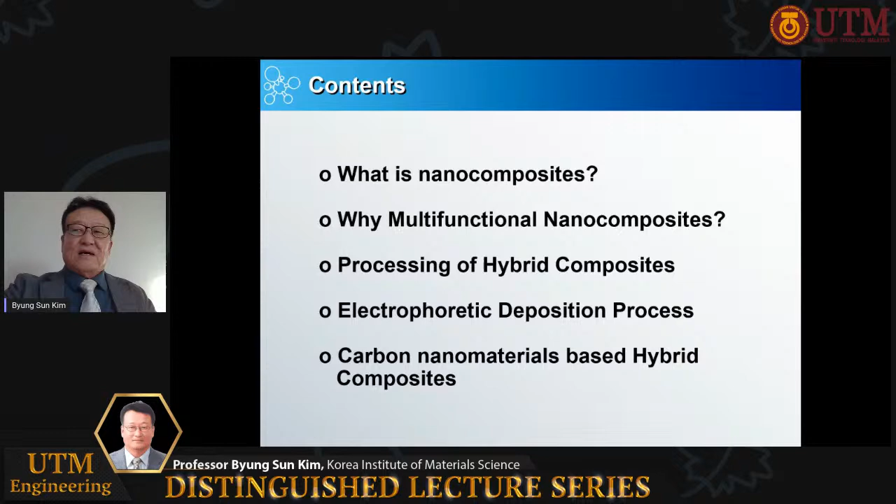What is nanocomposites? When a polymer is reinforced with nano-sized filler, such as clay, carbon nanotubes, or graphene, the resulting material is called nanocomposites. At least one dimension of the filler should be less than 100 nanometers. Polymer nanocomposites are multi-phase hybrid materials that show significantly better thermal, mechanical, barrier, and flammability properties compared to the base polymer at relatively low filler loading. Due to its ability to offer enhanced properties, polymer nanocomposites are used in most of our commodity products today. Next page please.

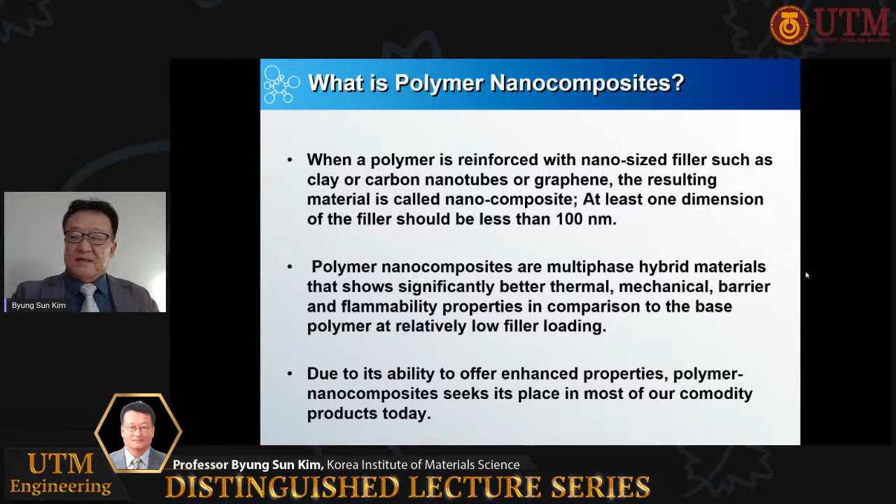Why multifunctional nanocomposites? Due to the development of aerospace, energy, electronics, and telecommunication industries, several requirements are combined in composite systems. Current efforts are focused on improving mechanical, electrical, and thermal properties, as well as combining health monitoring systems with structural composites. Presently, composite materials provide outstanding properties, however relatively simple functions. The future may require higher-end multifunctionality, including hybrid, light and compact, higher integration and eco-friendly materials. Future may also demand structural functional, multi-scale, hybrid, and intellectual and smart composite.

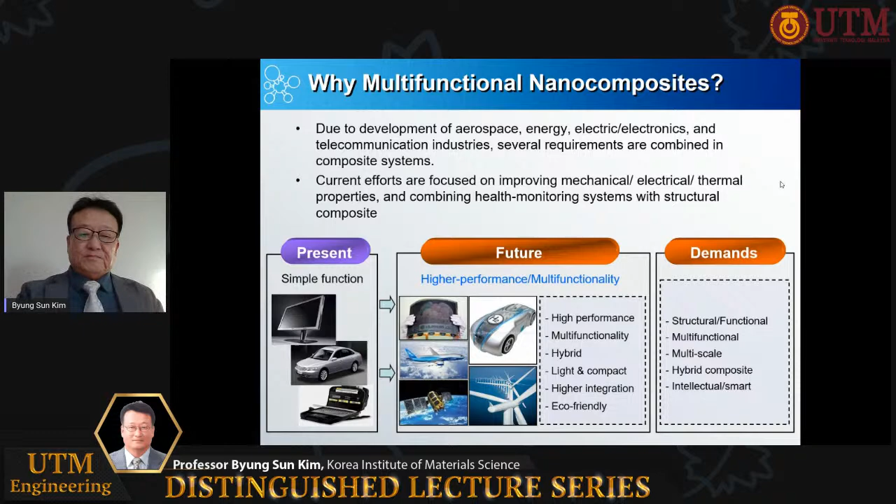Multi-scale hybrid composites are materials that make use of nanofillers to improve the mechanical properties of conventional fiber composites, such as interlaminar shear strength, or to incorporate new features such as electrical properties. Multi-scale hybrid composite requires the development of technologies for advanced carbon nanoparticles, microfiber, multi-scale, multi-directional hybrid composites with structural performance and multifunctionality. Multi-scale, multi-phenomena modeling of structure, property, and function requires modeling hierarchy, bridging the scale from nano to macro.

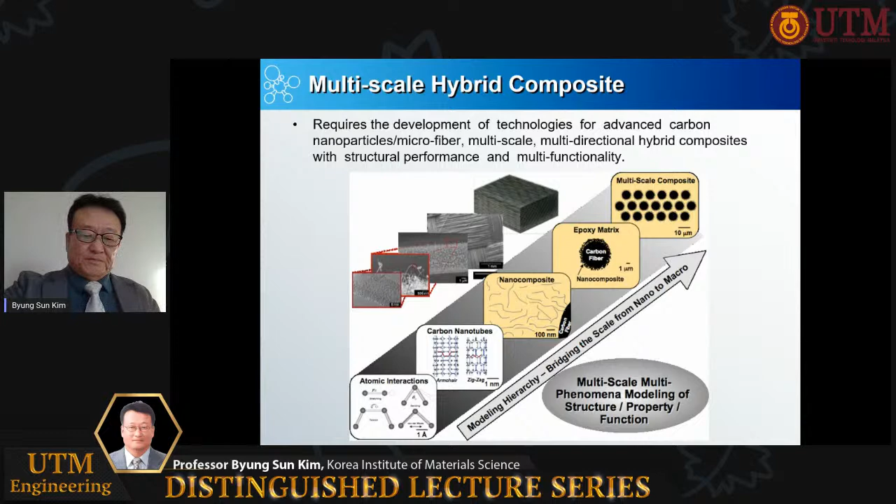Advanced micro-nanocomposites combine reinforcements with different length scales, simply an addition of microfibers and carbon nanomaterials. Microfibers provide structural properties such as light and strong, easy tailoring, and design flexibility, while nanomaterials may provide ultra-high strength, high functionality, and high aspect ratio.

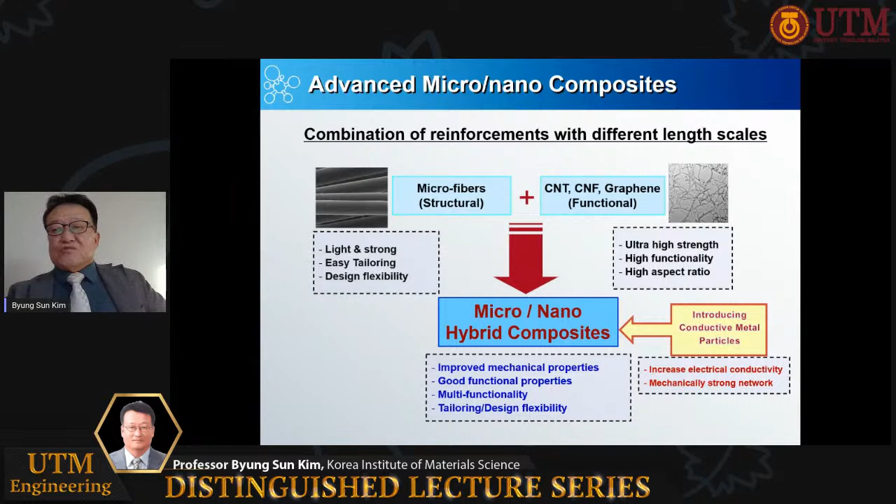The addition of these two materials creates micro-nano hybrid composites, which may have improved mechanical properties, good functional properties, multifunctionality, tailoring, and design flexibility. Moreover, if conductive metal particles are additionally introduced to the nanocomposite, further increase in electrical conductivity and a mechanically stronger network may be added.

In processing of hybrid composites, the bottleneck technologies are difficulties of even dispersion of nanoparticles within the matrix, which causes particle agglomeration, and difficulty to infuse nanoparticles into the preform due to high viscosity. Overall, limited percentage of nanoparticles and lack of uniformity within the composite may occur.

This phenomenon can be seen in the top view. When the CNT and resin mixture is poured onto a stack of fabrics, the CNT may be poorly dispersed and agglomerated at the area of CNT addition. These bottleneck technologies are responsible for the reduction of structural and functional properties of the hybrid composite.

However, with improved technology, these issues may be solved. With new technologies, high percentage of carbon nanomaterials and uniform distribution can be achieved. By hybridization of the reinforcements, carbon nanomaterials can be evenly deposited on carbon fabric by EPD. By hybridization of carbon nanomaterials and resin, B-stage resin film may be processed.

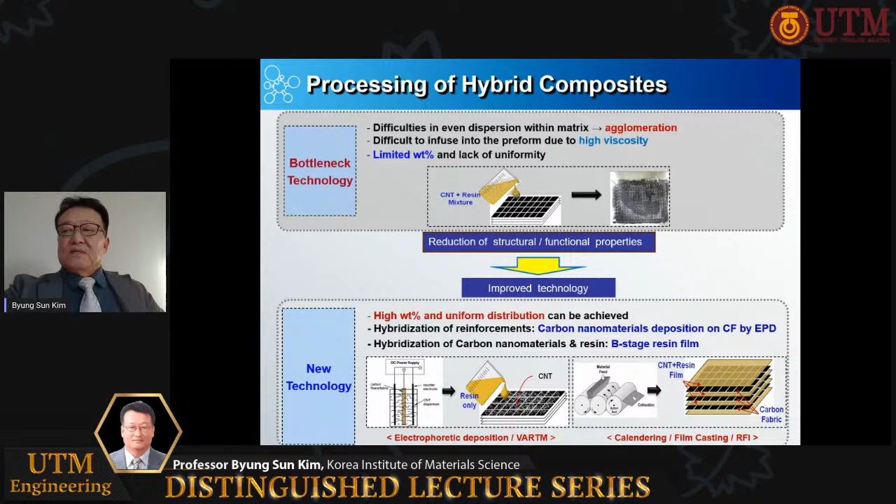This slide summarizes some of the previous research on hybrid composites. Top left is CNT aluminum composite processed by hot press and extrusion. Bottom left is CNT aluminum composite processed by spark plasma sintering. Top right is CNT copper composite processed by molecular level mixing.

All three processes have used mechanical mixing techniques and high sintering temperatures. The results were inhomogeneous nanoparticle dispersion, composite degradation, slow process, and low scalability. However, with the EPD process, simple and effective dispersion may be achieved, and the final composite is readily scalable for large scale production.

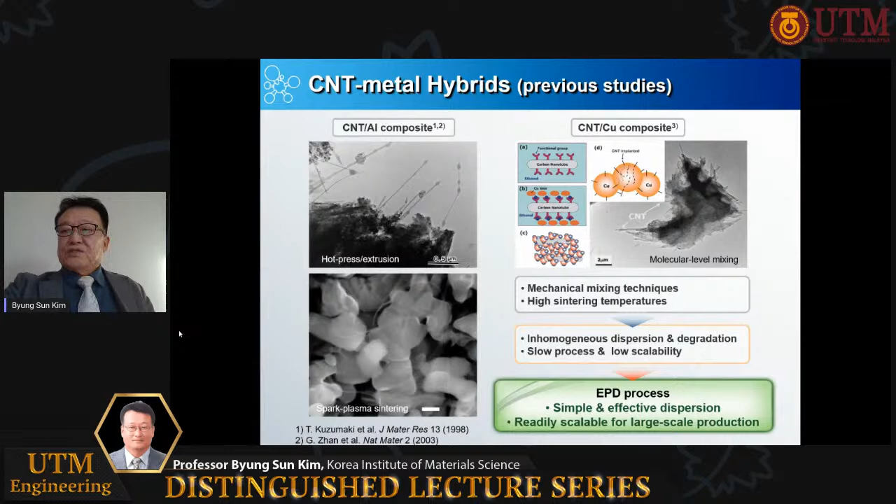Van der Waals forces include attraction and repulsion between atoms, molecules, and surfaces, as well as other intermolecular forces. CNT is known to possess a very high aspect ratio of about 10,000, Young's modulus of 1 to 2 terapascal, and tensile strength of 200 gigapascal.

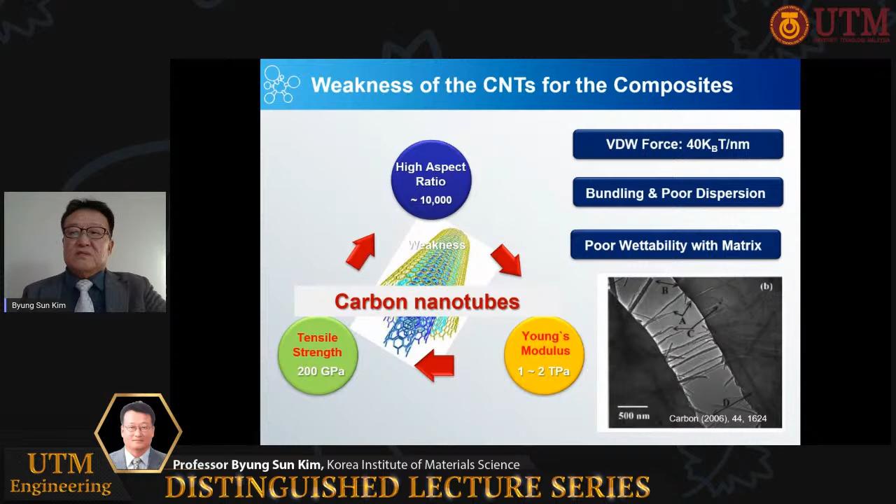However, due to Van der Waals forces acting between CNTs, bundling and poor dispersion of CNT exists within the matrix, which as a result causes poor wettability within the matrix. These are the major obstacles for the most efficient composite applications.

The electrophoretic deposition process is based on the movement and deposition of charged particles in an electric field onto a conductive electrode to develop thin or thick films and coatings. The advantages of EPD process are the short formation time, simple apparatus, and the ability to produce uniform coatings on complex geometries.

In other words, electrophoretic deposition is an electrocoating method such that the charged particles in a suitable suspension move toward an anode or cathode under the electric field. Aqueous suspension is used in this method. Under the electric field, the charged particles in the solution are moved and deposited on the opposite electrode surface.

Next. Next page. Okay, thank you.

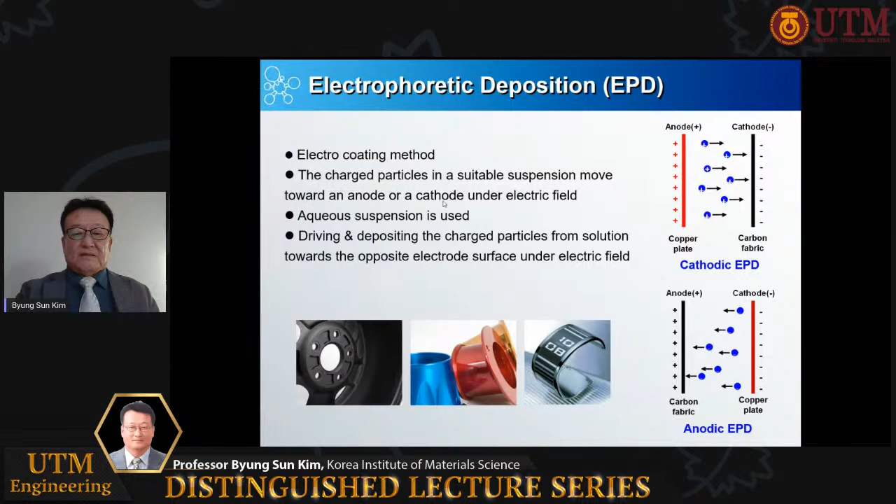In manufacturing of the novel CNT copper hybrid, there are two ways to treat carbon nanomaterials such as CNT. In the cathodic EPD process, as shown on the top portion of this flow diagram, CNTs are PEI treated to have plus charge. Then these CNTs via EPD process will be deposited on the surface of the carbon fabric to produce formicary-like CNT copper nanostructures.

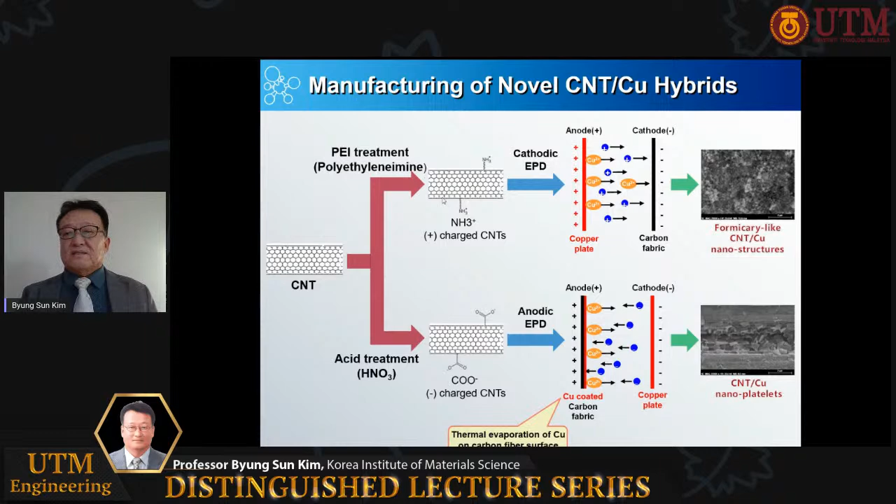In the anodic EPD process, CNTs are nitric acid treated to have minus charge. Then these CNTs via EPD process will be deposited on the surface of copper-coated carbon fabric to produce CNT copper nanoplatelets. In the next few slides, the EPD processes will be discussed in more detail.

In cathodic EPD, under an electric field, there will be electrical oxidation on the anode. Then the copper element from the copper plate and the plus charged CNTs move toward the cathode and are simultaneously deposited on the surface of the carbon fabric.

The picture of the copper plates below shows the dark copper plate before and the cleaner copper plate after the cathodic EPD process. This method may be used to clean the copper plate, although it may be a little bit expensive.

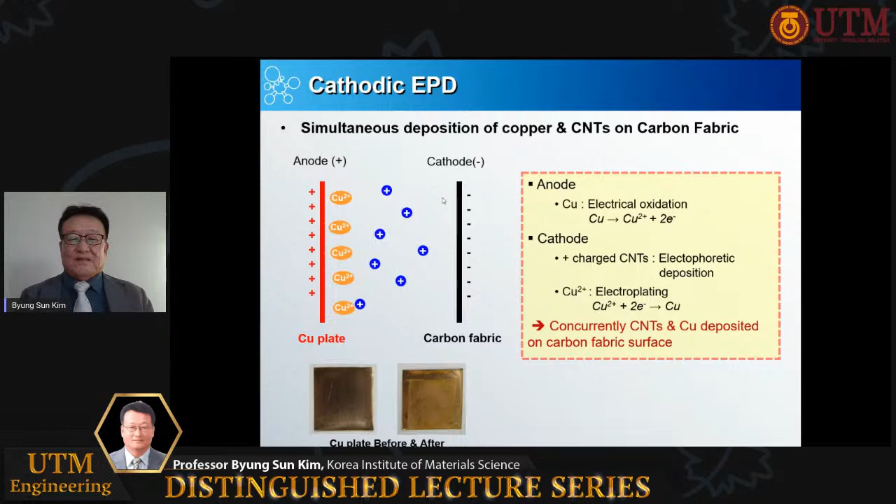Cathodic electrophoretic deposition process has been applied to produce unique carbon nanotube copper nanostructures on carbon fiber surfaces. During the deposition process, ionized copper and positively charged CNTs are accelerated towards the carbon fiber by the applied electric fields. An interconnected formicary-like network of nanotubes and nanoparticles is formed, where copper nucleation and growth occurs predominantly at the nanotube crossings and edge contact locations.

When embedded in a structural composite, the CNT copper structures create a highly conductive and strongly bonded network, shown by the significant enhancement in both electrical conductivity and interlaminar shear strength compared to composite without the CNT copper nanostructures. Therefore, the electrical conductivity of the hybrid composite in all directions may be the same and outstanding.

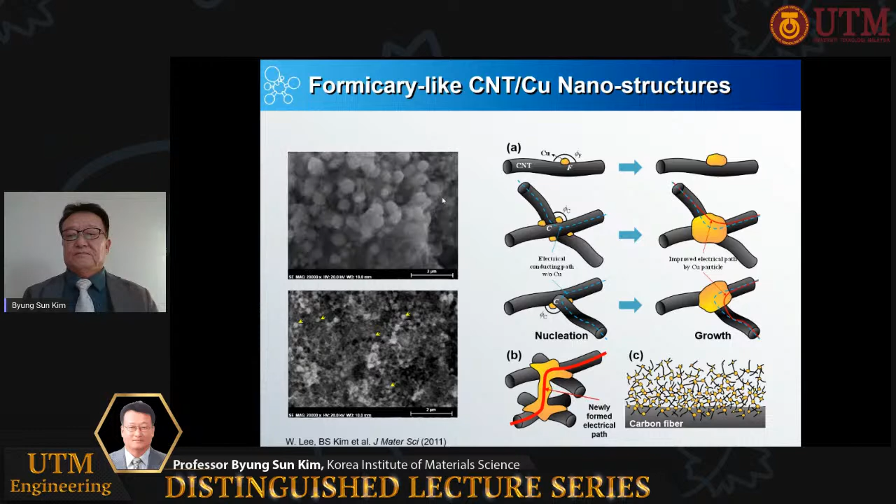Anodic EPD is a two-step deposition process, which includes thermal vapor deposition of copper on carbon fabric before the anodic EPD process. Thermal vapor deposition of copper on carbon fabric is the sputtering of copper element onto carbon fabric.

In the anodic EPD process, under an electric field, minus charged CNTs move toward an anode and are deposited on copper-coated carbon fabric. The schematic drawing below shows carbon fabric before and after copper coating by thermal evaporation. Obviously, brown color clearly shows the copper element deposition.

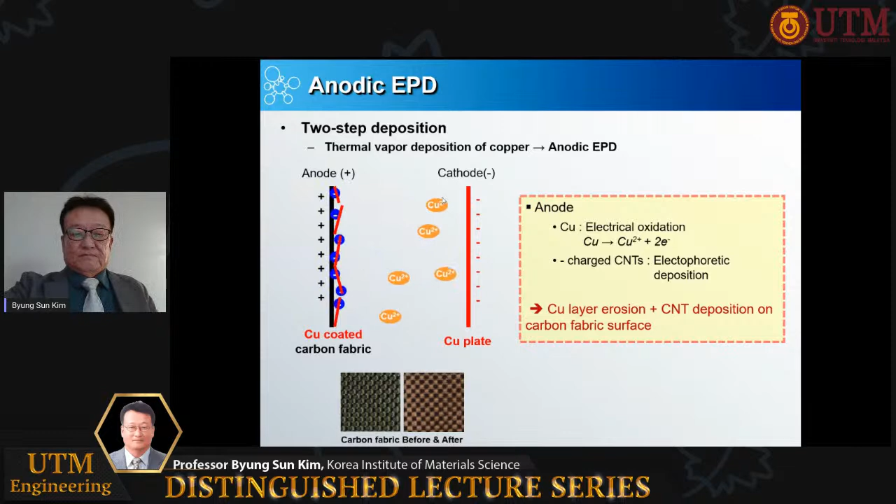Carbon nanotube reinforced copper nanoplatelets were developed by a simple two-step deposition method: thermal vapor deposition of copper and anodic electrophoretic deposition of CNT. Due to the fast corrosion during the electrophoresis, the copper layer is broken into pieces and exfoliated to form platelet structures.

Then during the EPD process, the CNT deposition will bridge the gaps. Consequently, highly conductive and strong CNT copper nanoplatelets are effectively built up. When applied in carbon fiber composite, the CNT copper nanoplatelets significantly enhanced both interlaminar shear strength and electrical conductivity compared to baseline composites.

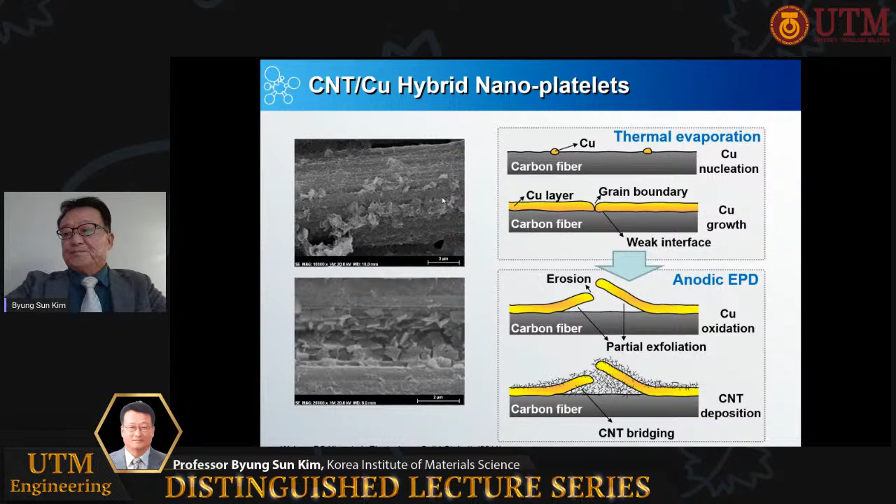In nanocomposite fabrication and characterization, 6 plies of carbon fabrics are EPD processed at the same time, using an aqueous solution. The processed carbon fabrics are dried and vacuum-assisted resin transfer molding processed to produce test specimens. Electrical conductivity tests are carried out for copper, CNT, and carbon fabric network in-plane and through the thickness of the nanocomposites. Mechanical tests are performed for shear stress and short beam properties of the nanocomposites.

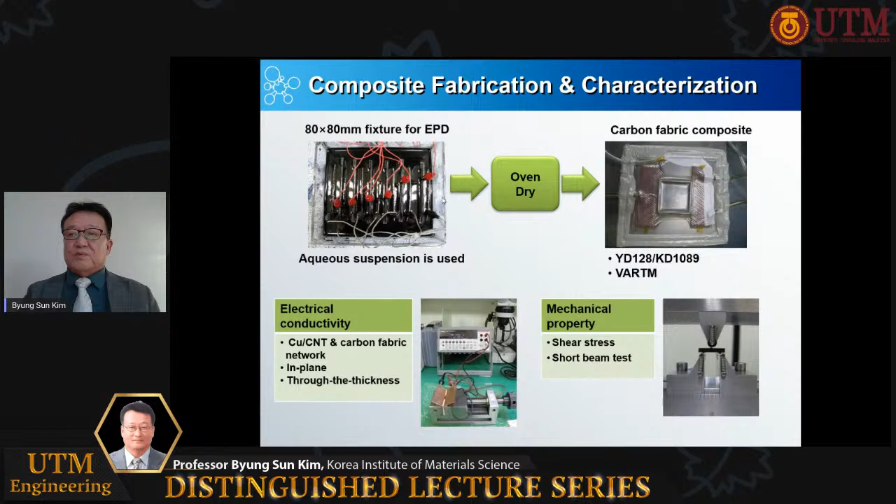The graph represents the electrical conductivities for various nanocomposites: copper only by cathodic process, copper only by thermal process, CNT only by anodic process, CNT copper formicary, and CNT copper platelets.

The in-plane electrical conductivities for all nanocomposites appear to have fairly similar values. However, the out-of-plane electrical conductivity is the highest with CNT copper formicary nanocomposite, and the CNT copper platelets nanocomposites show almost as good values.

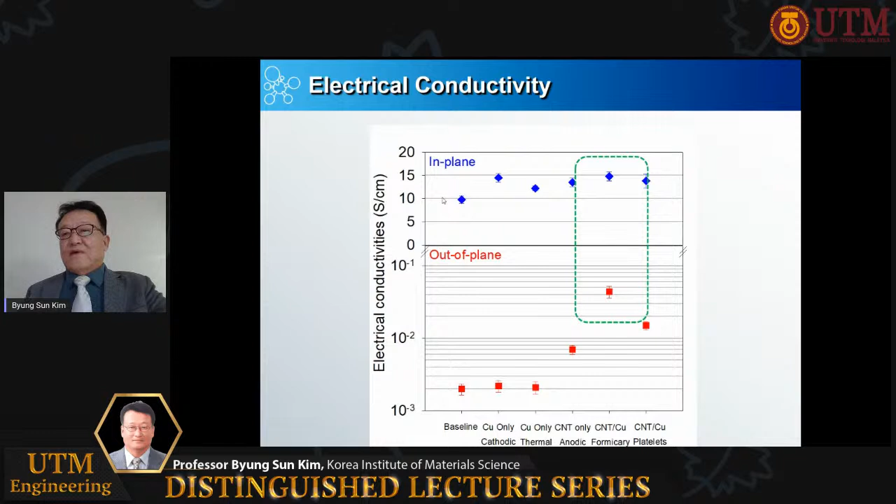The graph represents the interlaminar shear strength for various nanocomposites. Among all, the interlaminar shear strength is highest with both CNT copper formicary and CNT copper platelet nanocomposites. This may be due to the higher deposition of copper at CNT interfaces for CNT copper formicary nanocomposite, and that of CNTs in the gaps between carbon fiber and copper layers for CNT copper platelets.

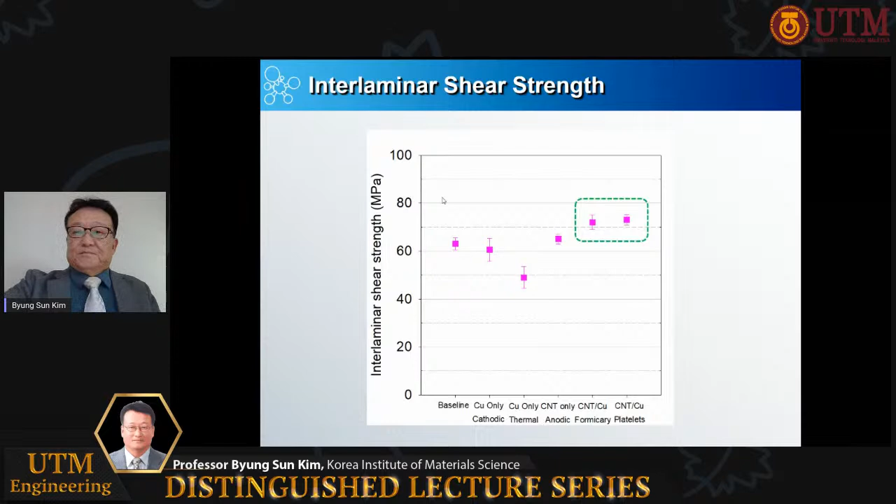This is the morphology for the fracture surfaces of nanocomposites compared with microcomposite. The fracture surface of the microcomposite is quite smooth compared with that of all nanocomposites. Fracture surfaces of all nanocomposites show deposition traces of CNT as well as copper.

However, the bottom three show more depositions of CNT and copper respectively. CNT copper depositions are seen on the fracture surfaces of formicary and platelet nanocomposites, while only CNT is deposited on CNT-only nanocomposites. These fracture surfaces may explain why the bottom three composites' electrical conductivity and interlaminar shear strength have relatively higher values.

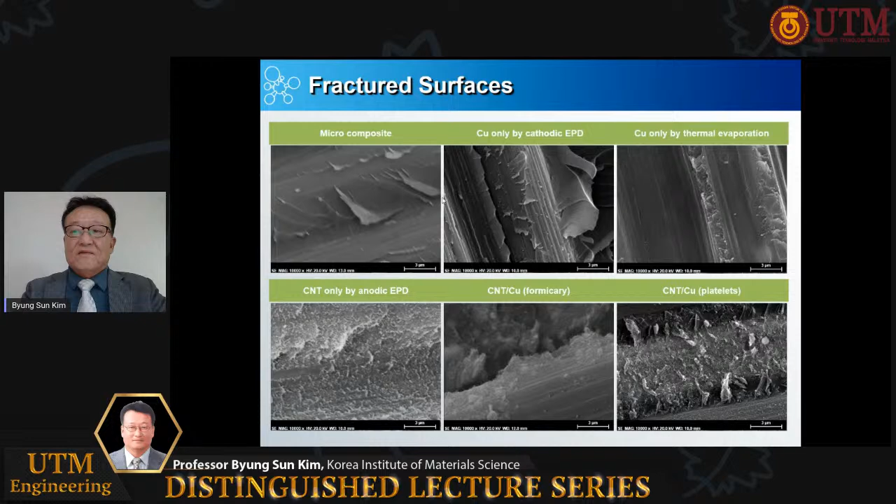Using the sizing agent characteristics of graphene oxide, the electrophoretic deposition process is used. In this process, when the electric field is applied to the substrate in the graphene oxide solution, graphene oxide can be attached to the anode substrate because graphene oxide has a negative charge.

So here, the carbon fabric is connected to the anode and the stainless steel to the cathode as the counter electrode. When the electric field is applied, graphene oxide is coated on the carbon fabric surface. Finally, graphene oxide coated carbon fabric reinforced composite is dried and stacked to be fabricated using the VARTM process.

As shown in the SEM morphologies, graphene oxide is very well coated on the carbon fiber surface with 7/10,000 and 7/100th of a weight percent of graphene oxide, respectively.

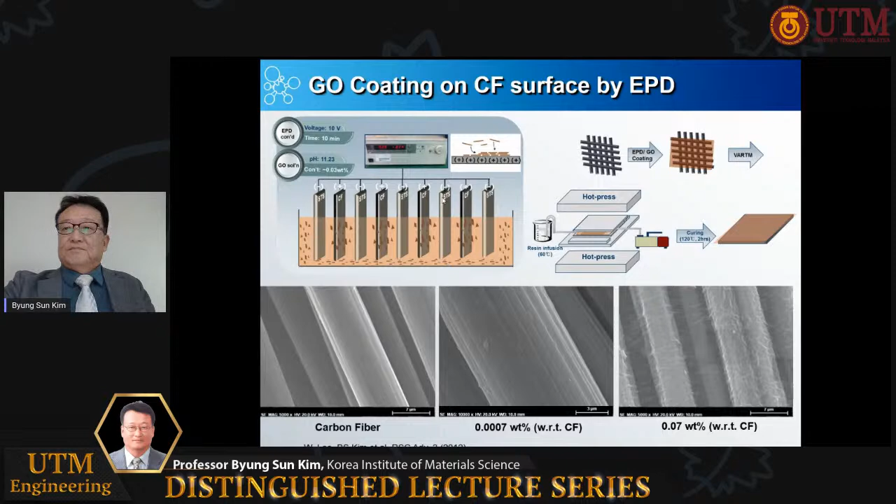Here, the interfacial property of graphene oxide coated carbon fiber is investigated in terms of both quantitative and qualitative approaches. When a micro drop of epoxy resin is placed on a single carbon fiber, graphene oxide coated carbon fiber showed less contact angle, which means the graphene oxide increased the wettability with epoxy resin.

And also, when the surface free energy is calculated by the equation shown here, which is the sum of dispersive and polar components, graphene oxide coated carbon fiber showed higher polar and dispersive surface energy. Therefore, it can be proved that the interfacial strength between carbon fiber and epoxy is higher.

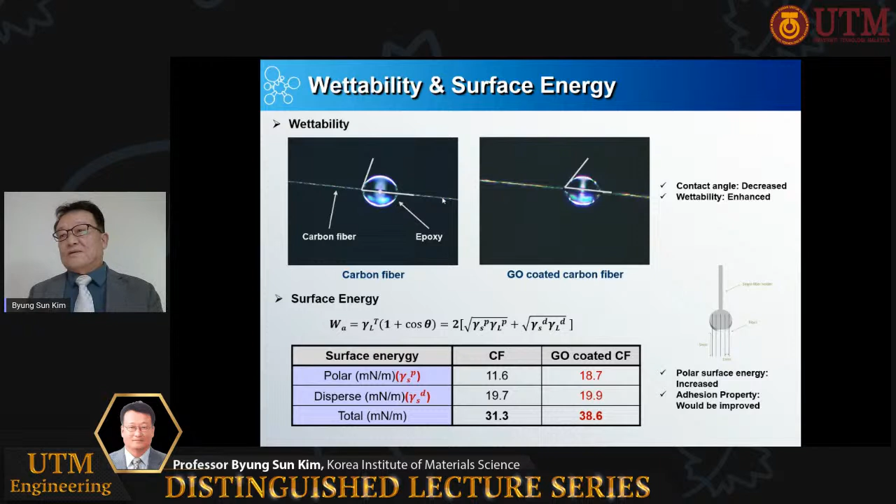The graph shows the effect of graphene oxide coating on the interlaminar shear strength, an important material property for the design of laminated composite structures subjected to transverse load. With only 7/10,000 of a weight percent of graphene oxide coating, the interlaminar shear strength is increased by almost 10%. Previously, the same results were obtained with more than 1 weight percent of carbon nanotubes.

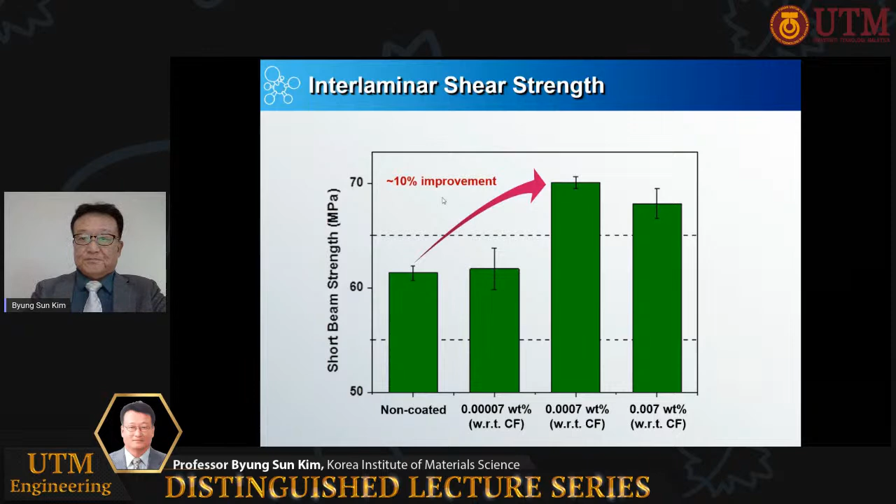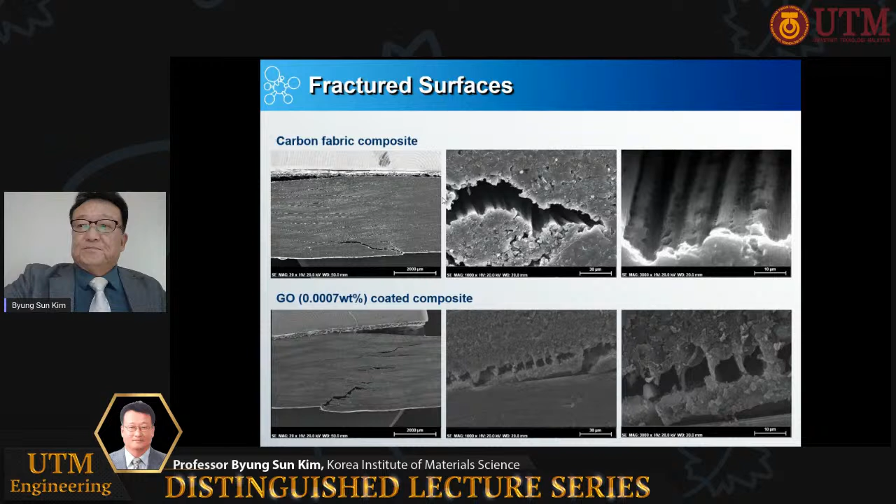In the next few slides, wire-type multifunctional hybrid composite fibers are discussed. For the wire-type supercapacitor, the requirements are that the stretchable wire-type supercapacitor for wearable devices should have high electrical conductivity, flexibility, high specific surface area, and tough stretchability.

Carbon fibers may be used as the collector for supercapacitors since they have high electrical conductivity and high flexibility. However, carbon fibers have a poor surface area, only 5 meters squared per gram, and this needs to be increased since the performance of the supercapacitor depends on specific surface area.

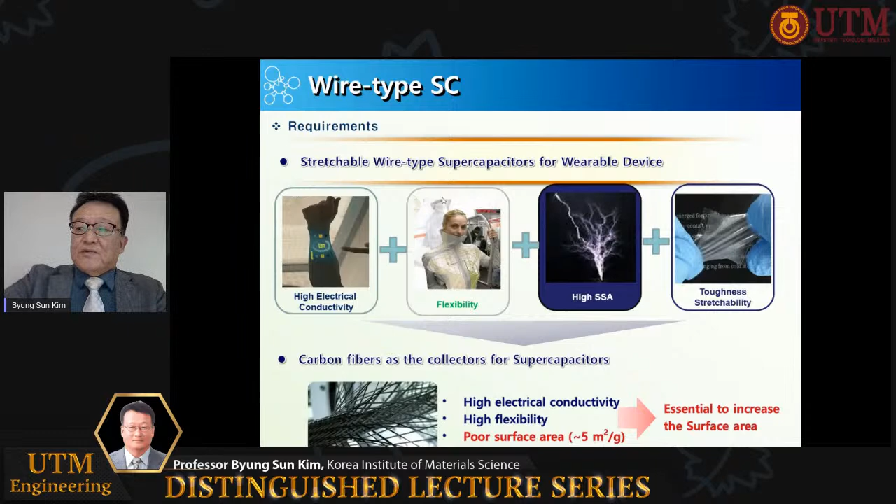In order to increase specific surface area, our strategy was to decorate single-wall CNT aerogels, which have the largest surface area and good electrical conductivity, around the carbon fiber surface. Firstly, graphene-coated single-wall CNT aerogel was synthesized as shown in the photos.

We carried out in situ polymerization of dopamine around the single-wall CNT network, as shown in the top schematic drawings. Uniform coating of graphitic layers was achieved with carbonization and nitrogen-containing graphene. Graphene-coated single-wall CNT aerogels are mechanically stable even after water absorption.

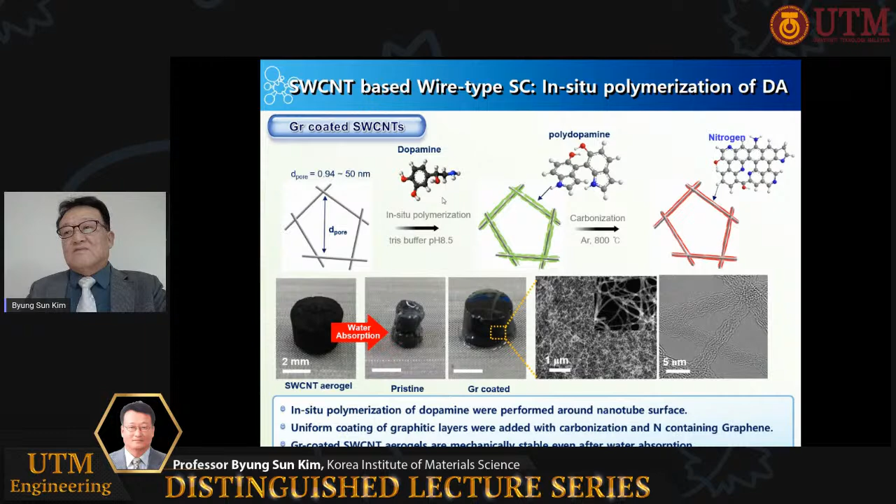Three-dimensional carbon nanostructure hydrogel was coated around the carbon fibers, which serve as the core collector. Increased surface area and capacitance for wire-type electrodes via porous SWCNT networks are obtained. Graphitic layer coating on the single-wall CNT networks enhances mechanical and electrical stability of the porous structures, which possess low equivalent series resistance and high electrical double layer capacitance.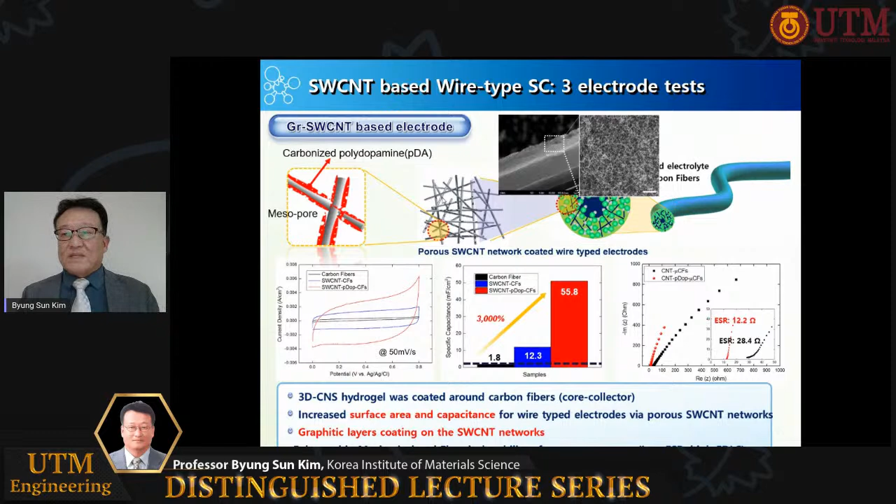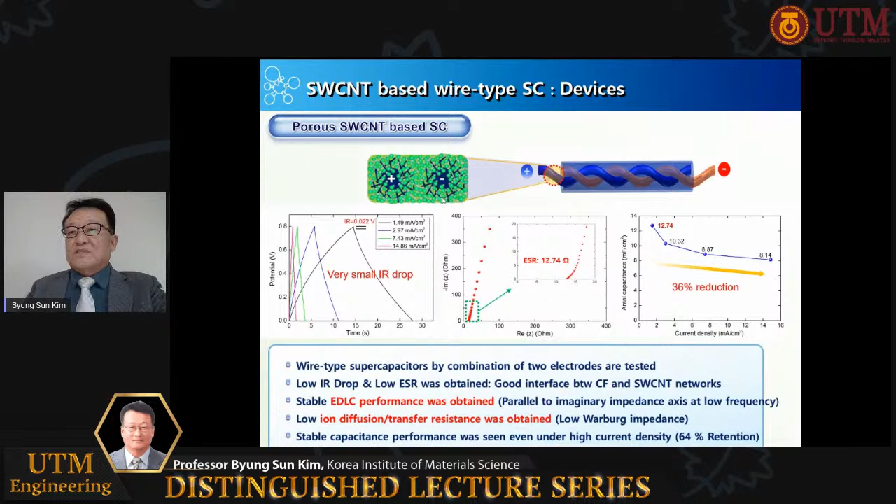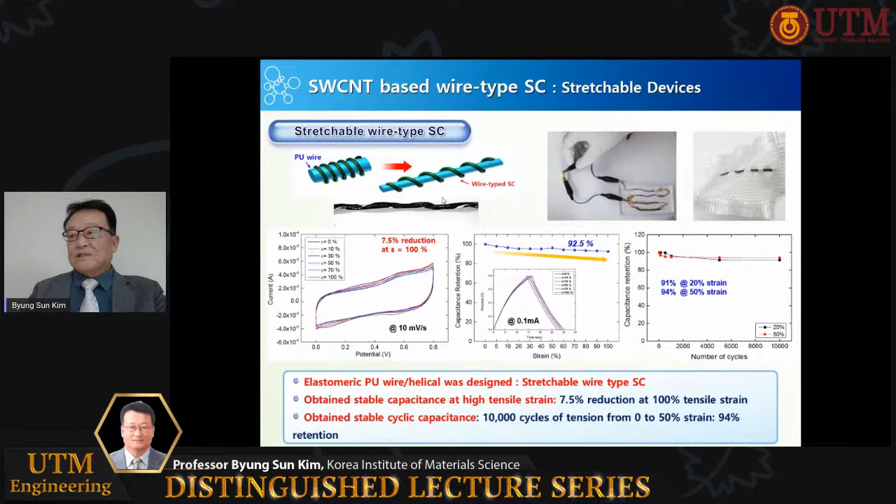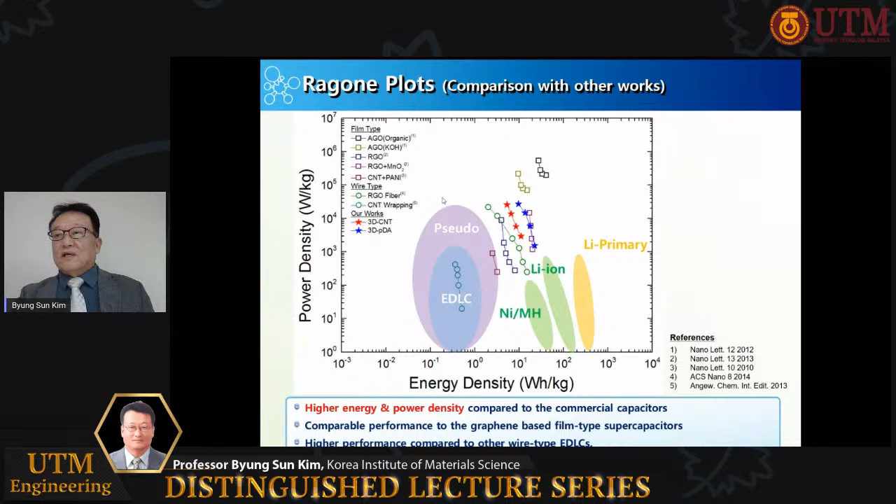In the Ragone plot, our wire's power density is indicated by red and blue stars, showing higher energy and power density compared to commercial capacitors, comparable performance to graphene-based film-type supercapacitors, and high performance compared to other wire-type electrical double layer capacitances.

Can I continue, or should I stop because of the time?

Okay, I'll go on. In order to have improved fiber-type transistors with higher electrical conductivity, stronger mechanical properties, and higher flexibility, graphene fibers are manufactured.

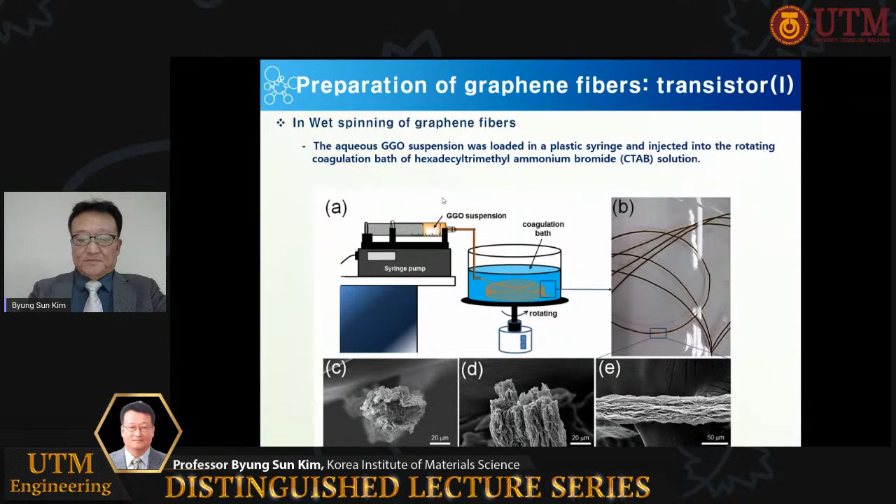In wet spinning of graphene fibers, the aqueous graphene oxide suspension was loaded in a plastic syringe and injected into the rotating coagulation bath of hexadecyl trimethyl ammonium bromide solution. In the wet drawing of the graphene fiber, the wet drawing system was simply realized in the drawing process by adjusting the distance between each end of the gel fibers.

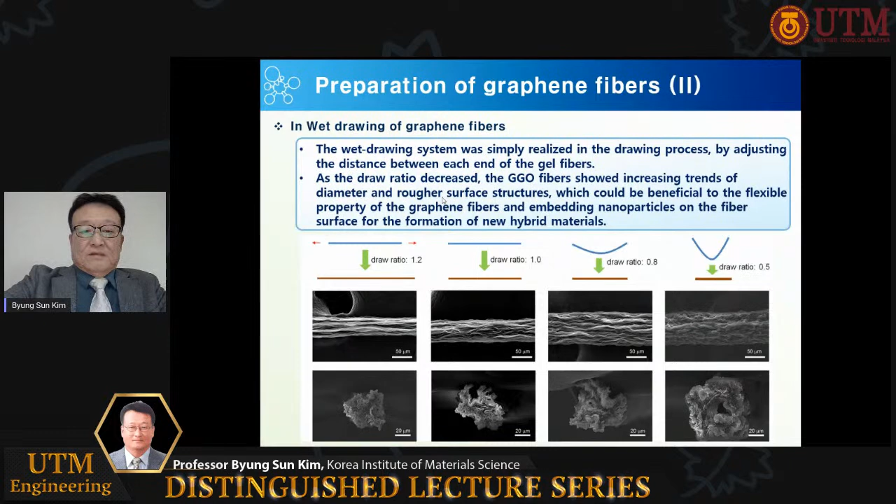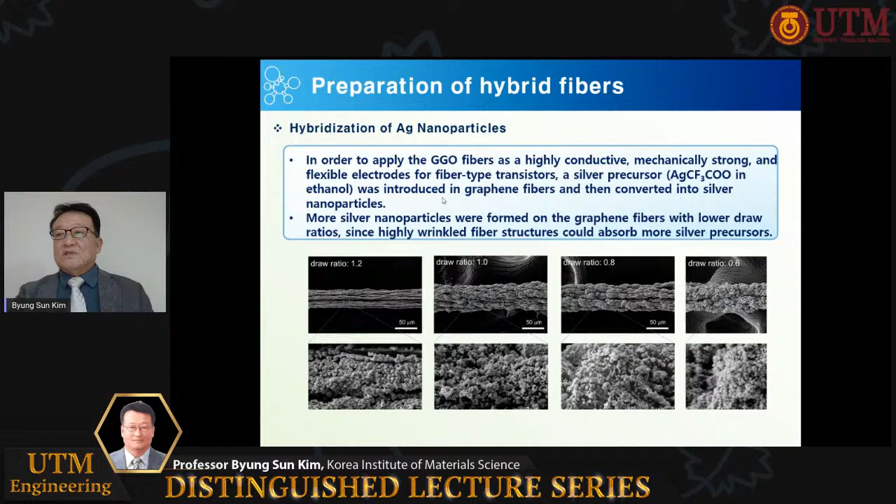In the hybridization of silver nanoparticles, in order to apply graphene oxide fiber as a highly conductive, mechanically strong, and flexible electrode for fiber-type transistors, a silver precursor was introduced into graphene fibers and then converted into silver nanoparticles.

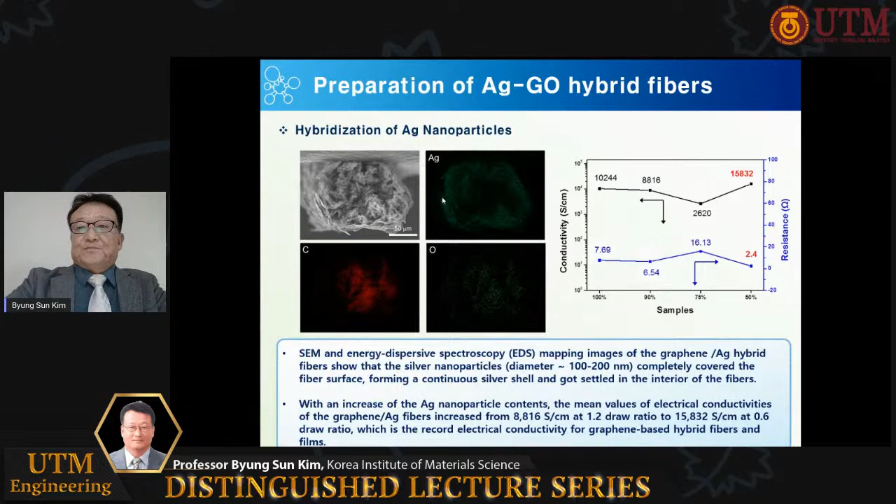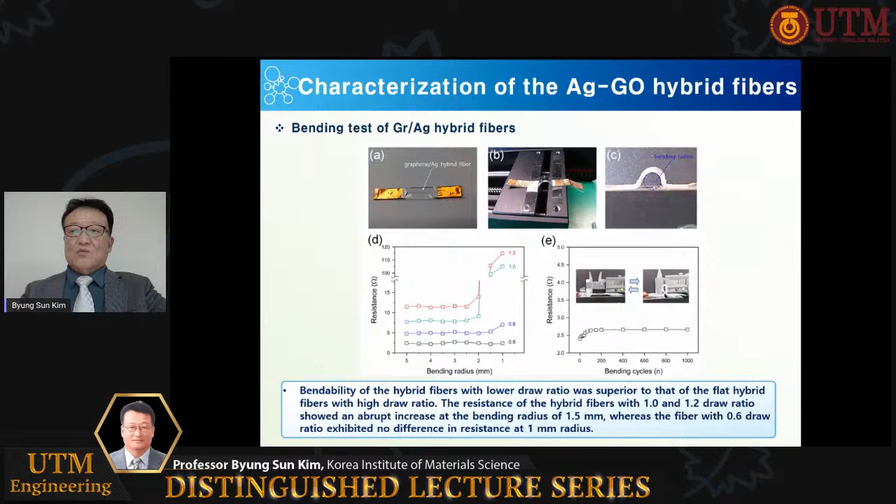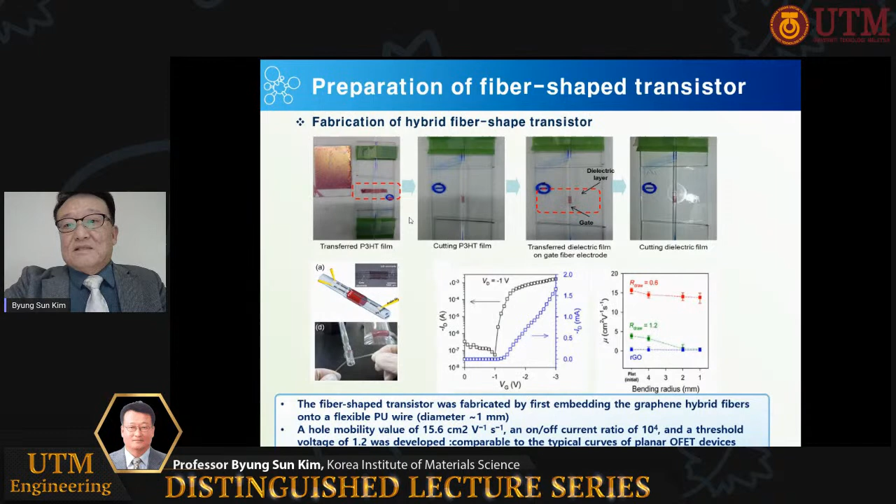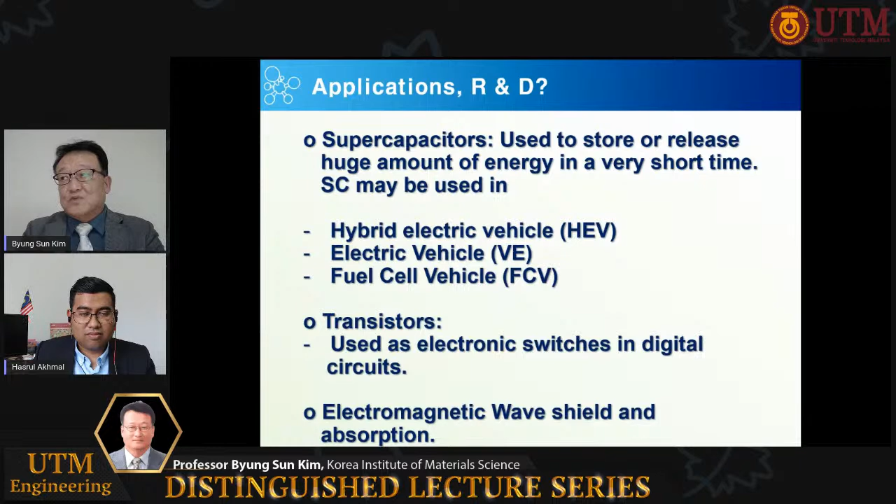For example, cellular phones 10, 15 years ago, if you talked too much on the phone, it used to get warm, because at the time nanoparticles were too expensive to put in your cell phone. Now it's much cheaper, so they put more in your cell phone cases, and you talk as much but your phone doesn't get as warm as before. That's because the electromagnetic waves are absorbed.

I see, all right, Prof, we have another question from the floor, from Dr. Jamari Ghaffar: how about the cost in fabrication of hybrid composite compared with traditional CFRP, for example, aerostructure product for strength and weight?

Well, right now it's more expensive, because what I've shown you is lab scale work. If we come up with some processing equipment for large scale production, maybe it can be comparable, but at this moment we only did it at lab scale, so I would say it's more expensive.